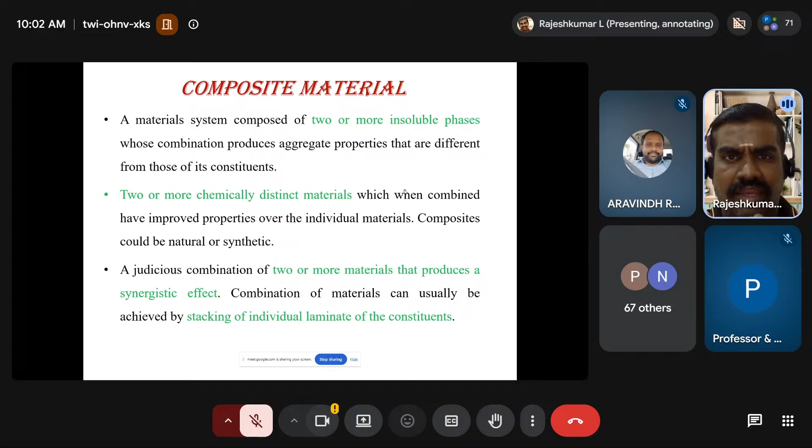So as we know, sandwich is the best example of composite material. Greens, cheese, meat, everything aggregated together has its own nutritional value. So entirely, sandwich will have its own nutritional value. Likewise, in a composite material, when many individual constituents are mixed together, with suitable processing techniques and suitable compatibility ideas, they will render a material of better strength. So this is the ideology of developing composite material.

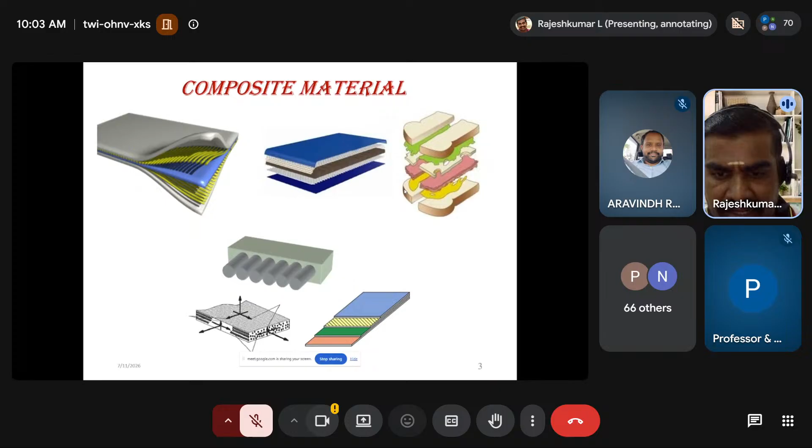So the main advantage of any composite material is its specific strength and specific stiffness. Since the materials are expected to possess very minimum density and as maximum strength as possible, its specific strength is expected to be very high, and it is obviously very high as far as many research results are concerned. And its specific stiffness, that is stiffness to weight ratio, is also very high. Other properties such as fatigue strength and toughness are also very high when compared with a few monolithic metals, not alloys or compounds, monolithic metals.

And the main advantage of any fiber reinforced composite is it is devoid of corrosion. So corrosion will not be an integral part as far as any fiber reinforced composite is concerned. So unlike other metallic or monolithic materials, composite materials will not experience corrosion.

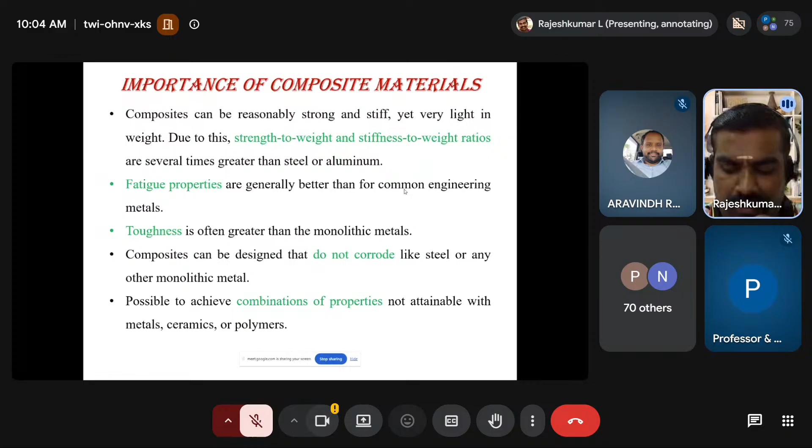So these are some few standalone applications of composite materials, and their application prospects are growing day by day. Since the research on composite materials is getting deeper and deeper, and since the processing techniques, the material novelty, or their process parameters are getting more and more research prospects, the applications of composite materials are getting deeper day by day.

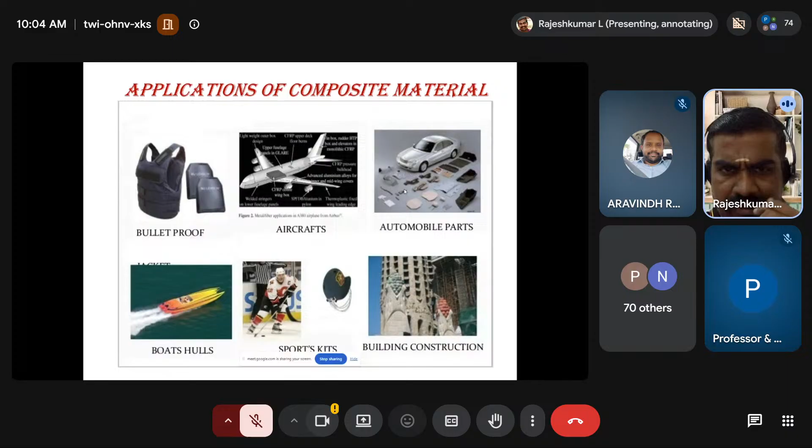Usually, a composite material will have two phases, as we all know very clearly. One is a matrix phase, the other is a reinforcement phase, or a primary phase and a secondary phase. The primary phase is of higher volume and the secondary phase is of a lower volume. The primary phase functions to incorporate the secondary phase within it, and it is characterized by low density and good shear properties, whereas the secondary phase will have high strength, high stiffness, and obviously low density.

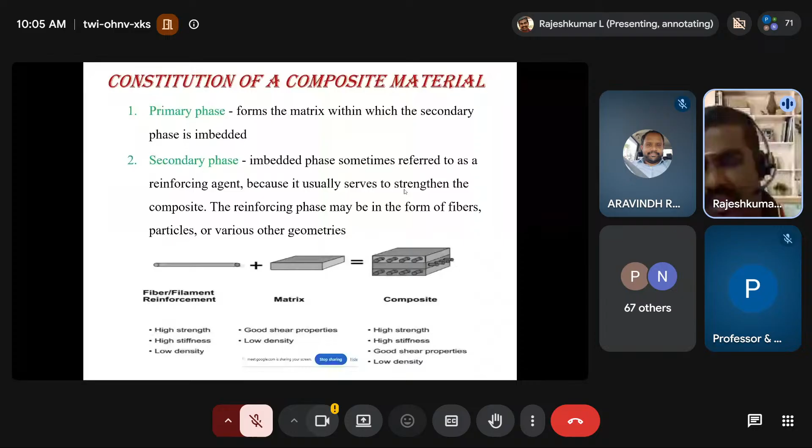When a low density material combines with a low density material, we will get another low density material. And you can see the properties of both constituents of a composite material are aggregated together to form a better performing composite material. Usually the primary phase holds the embedded phase and forms the bulk part, and in most cases the matrix will have a low strength which has to be enhanced by a secondary phase material, but its bonding strength is very high. It is usually corrosion resistant.

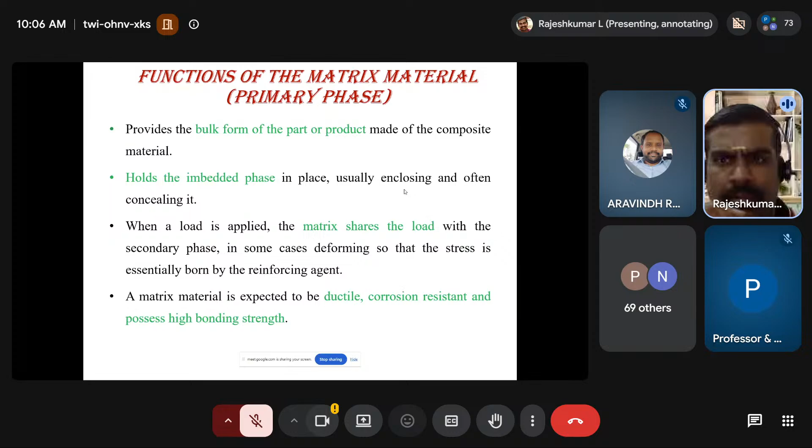The corrosion resistance of the composite material is incorporated by the matrix material alone. A reinforcement material may also not be corrosion prone, but majorly the corrosion resistance is imparted to the composite material through the matrix material. Whereas the reinforcement particle is of lower volume, it is reinforced in lower quantities in the matrix material. They are mixed together to form a composite material, like steel and concrete. Suitable processing techniques are used to form a laminated or fiber reinforced composite material. Mostly the secondary phase will have various forms such as fibers, particles, and flakes.

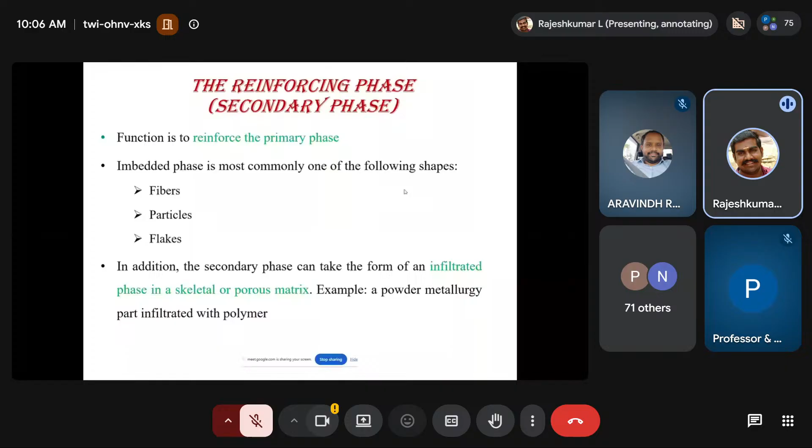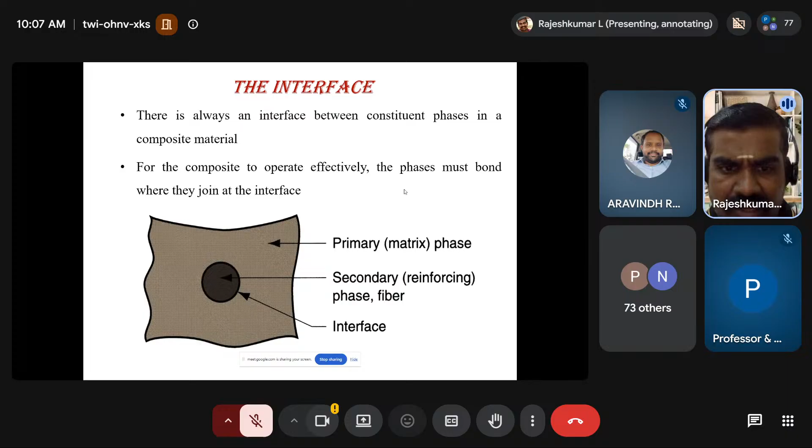This interface forms a region. Interfacial properties of any composite material are very important since both constituent phases of the composites are chemically distinct. They should form an interface, where the interfacial strength of any composite material determines its ultimate strength. That is why, as previously mentioned, the compatibility between the secondary and the primary phase plays a major role in forming the interface. So whenever a composite material has to be a high performance or efficient composite material, its interface has to be as good as possible, so that the interfacial compatibility between the primary phase and the secondary phase is better and the composite material results with higher strength.

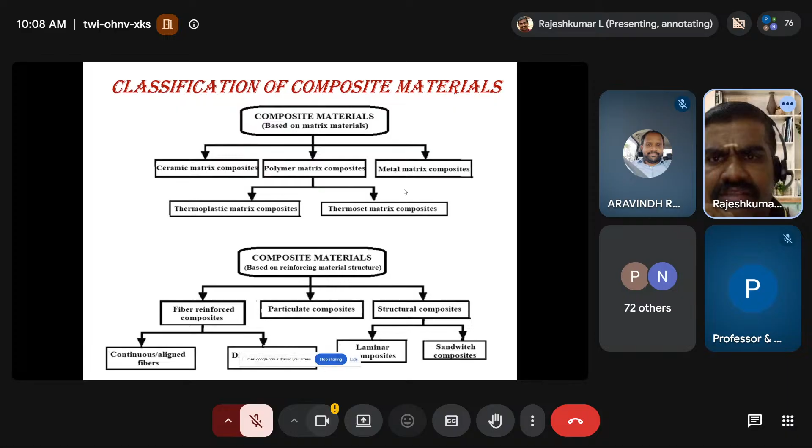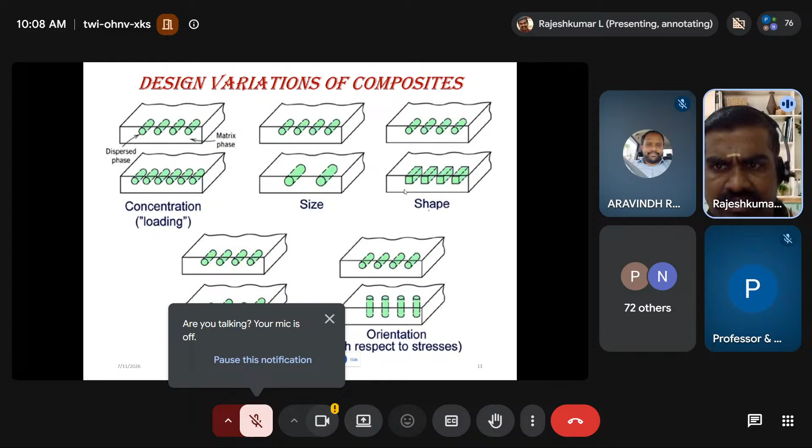So these are the basic classifications of composite material. Based on matrix, we have 3 classifications, and based on reinforcements, we have another 3 classifications. These are very common. As far as any composite material is concerned, a composite can be designed based on various factors. It can be designed based on the concentration, that is either the volume fraction or the weight fraction of any material, or the size of the reinforcement, macro, micro, or nano. Recently, macro reinforcements are dipping down, whereas micro and nano are getting more and more visibility.

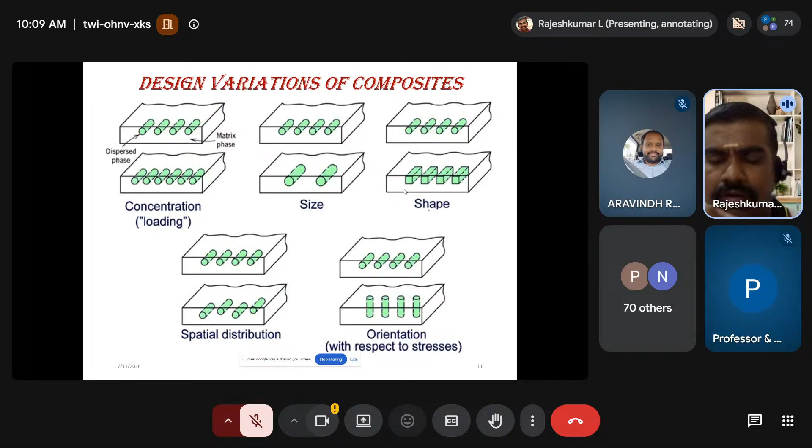And the shape of the reinforcement, as we have mentioned, fibers: rather than long fibers, short fibers are being reinforced recently in many composite materials, and flakes and whiskers are also preferred, so that the specific area which they occupy becomes lesser, the load transfer is higher, and the composite material will have a better strength. The spatial distribution, either unidirectional, bidirectional, or random orientation in fiber reinforced composites, is another factor by which a composite material can be designed, and the orientation with respect to the loading direction. Whenever the loading direction varies, the orientation of the secondary phase can also be varied, so that in that particular direction, the load bearing capacity of the composite material is better.

And usually there are natural and synthetic fibers in existence, and the synthetic fibers are derived from non-natural sources. So in order to counter that particular disadvantage of synthetic fibers, natural fiber is being used to reinforce the matrix material, a plastic, a thermosetting or thermoplastic material. Even though natural fibers have comparatively lesser strength when compared with synthetic fibers, they have their own application areas, and due to their sustainability, biodegradability, and renewability, natural fibers are mostly preferred in the current scenario.

And even though they are used only in low or medium density applications, their applicability shows a wider improvement due to various advantages of those natural fibers. Even the cost of processing of natural fibers is comparatively lesser than synthetic fibers. So these natural fibers have become the center of attraction for many researchers, and various research works are being undertaken as far as natural fibers are concerned.

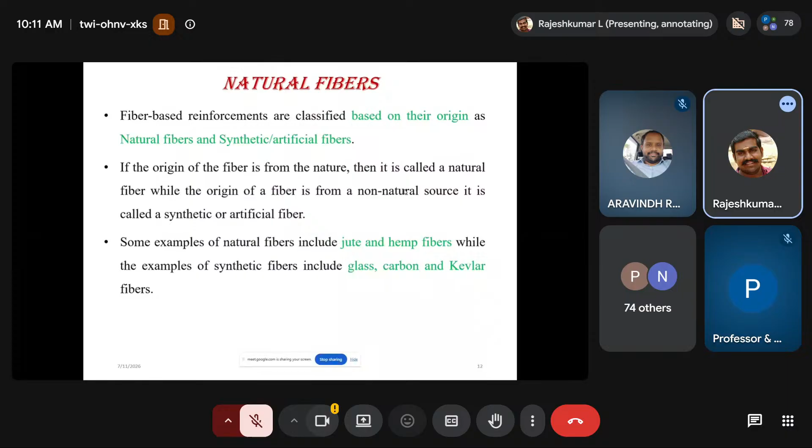Natural fibers can be used in various applications based on their origin, and some examples of natural fibers include jute and hemp. We'll also see the classification of natural fibers. Natural fibers are derived from various plant parts. Not only plant sources, but animal and mineral sources are also sources of natural fibers. So natural fibers don't mean only plant-based fibers, but also animal

And we know in most cases, animal fibers are also used as reinforcements. And recently, humans are also a source of natural fibers, like keratin. Keratin is the best source of natural fiber. Hair fibers are being researched in many cases as short fibers. So natural fibers are derived from natural renewable sources.

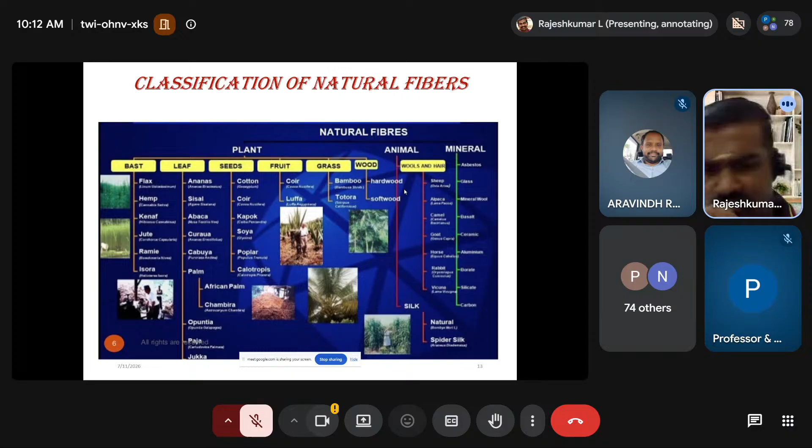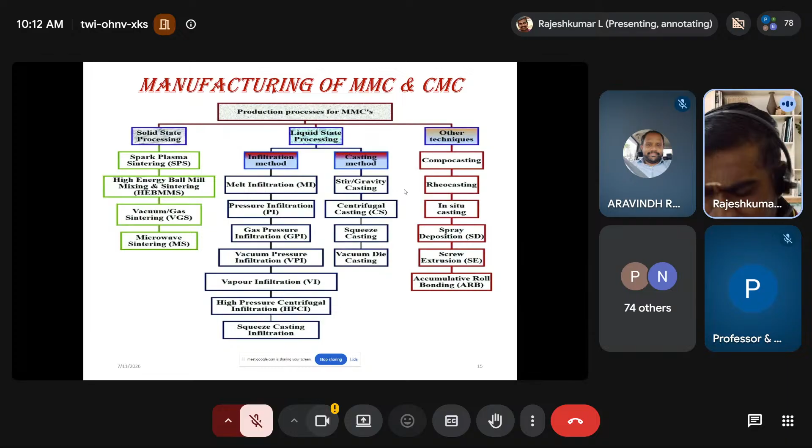Some of the common methods of manufacturing metal matrix and ceramic matrix composites are listed here. However, we are interested in manufacturing polymer matrix composites. There are four major methods of manufacturing polymer matrix composites. The main objective of all these methods is to develop a proper interface between the matrix and the reinforcement so that the interfacial strength of the composite increases, ultimately resulting in maximum strength of the composite material being developed. The most commonly used methods are hand layup, compression molding, and vacuum bagging.

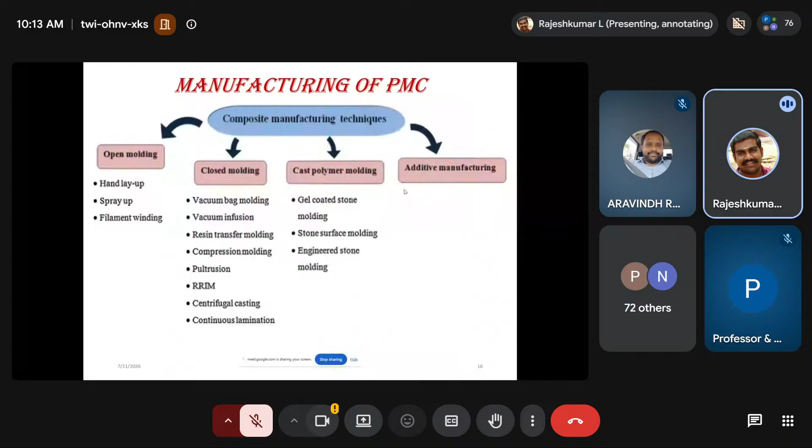And recently, additive manufacturing is a highly emerging area, where most researchers are oriented towards additive manufacturing methods to have better publishability of papers. Hand layup is a very simple and the oldest method of manufacturing composite materials. It is completely manual, and the fibers are reinforced layer by layer, over which a layer of resin is coated, and the final part is trimmed off.

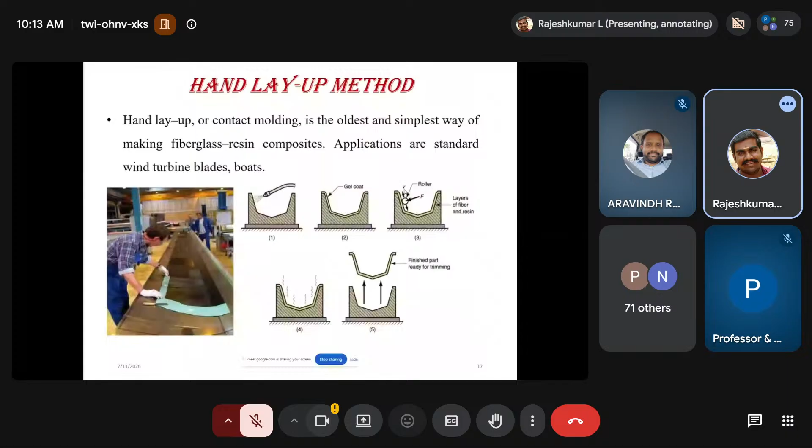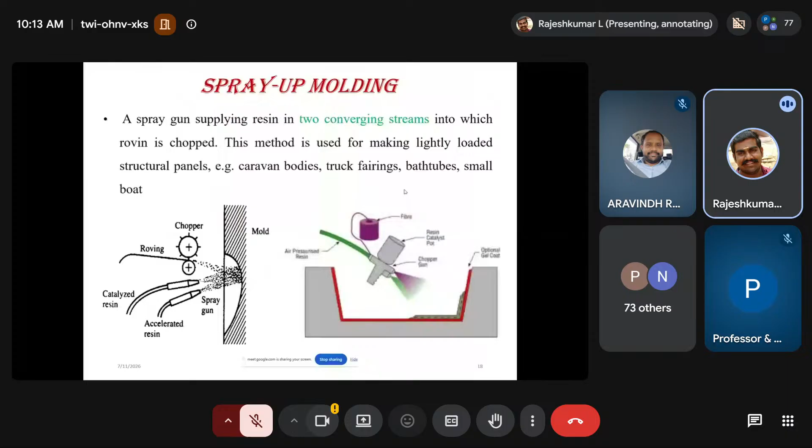Next is spray layup, which is like the hand layup method, but rather than placing layer by layer, both phases are sprayed together on a mold, and finally they are cured and used further. Vacuum bagging is specifically used for woven type natural fibers. When the fibers are used in the form of mats, vacuum bagging can be used, whereas this method cannot be used for short fibers or whiskers, and even for fillers, since the vacuum pump may be clogged.

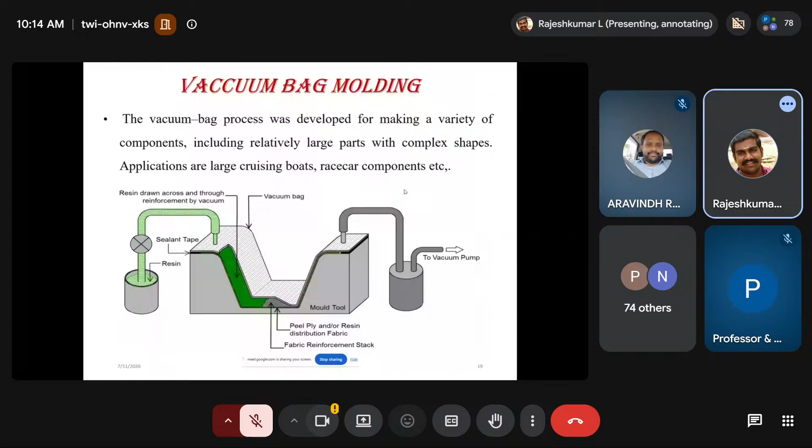So vacuum bagging is another type of composite manufacturing method. The composite resulting from vacuum bagging will have a better interface compared with other methods, other than compression molding. Compression molding is another technique, an advancement of hand layup, where pressure and temperature are applied through automatic machines. Pressure and temperature can be controlled through suitable gauges, and it contains an upper mold and a lower mold. In hand layup everything is manual, whereas in compression molding, when we place the laminates within the mold, the pressure and temperature control takes care of the cure. So compression molding is a major method of manufacturing composite materials these days.

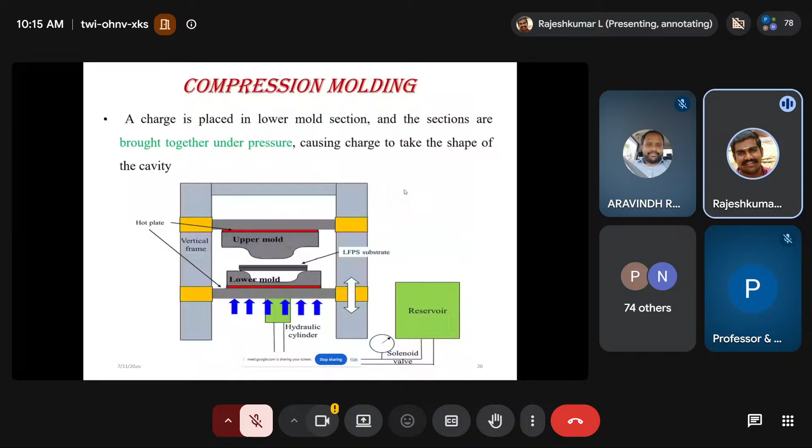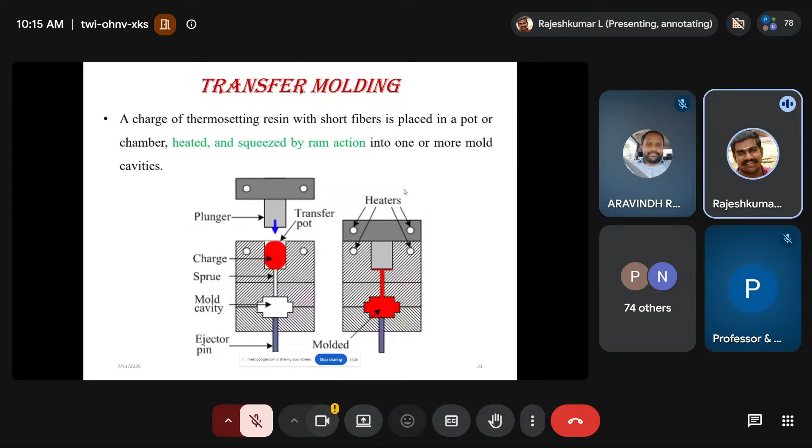When the compression molding machine is not available, researchers may opt for hand layup. Next is transfer molding. This is a very least used technique, however it was in existence previously. Transfer molding and injection molding are alike. These are specifically used for thermosetting composite materials. Injection molding is also used for large quantity production with low cost. A mold is injected with the contents of the composite and cured, and the mold is taken out with the final casting.

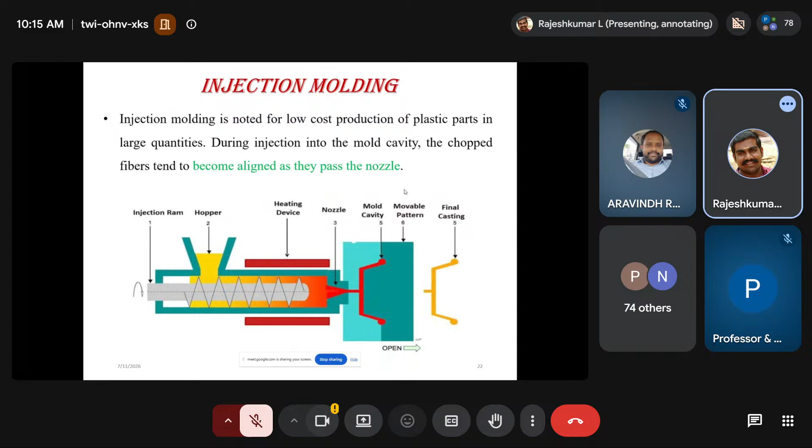And the most highly emerging technique is additive manufacturing, or 3D printing of composite materials. The research trend is in a transformative stage as far as additive manufacturing is concerned. So far, all the methods are analog, whereas this method produces a purely digital composite material. In all the previous cases material may be removed to obtain the final shape of the product, whereas in additive manufacturing the final shape is obtained directly by adding materials according to a predetermined model of the product.

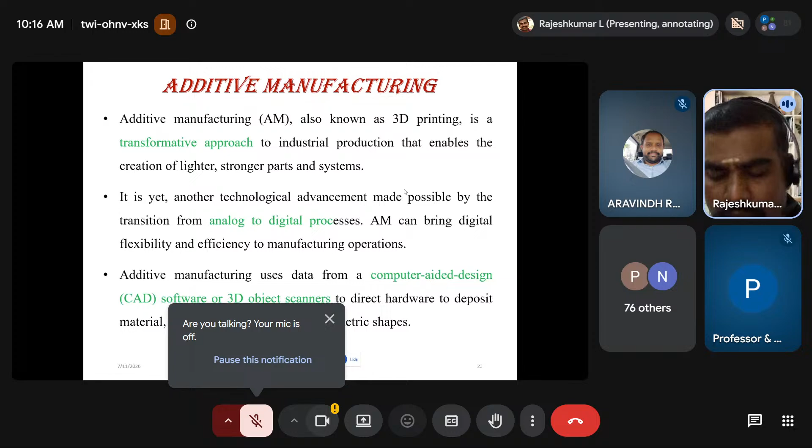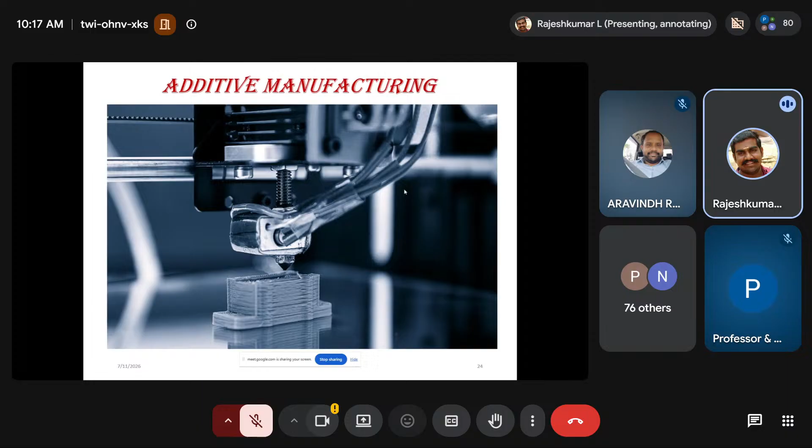Support structures are an integral part of additive manufacturing methods, where, in order to avoid distortion of the final material, whenever the lengths and breadths of the printed parts are very high, supports are given. The support structures are then removed, and finally this material is cured to form the final product. However, the strength of the final 3D printed product is not on par with the composites built through other methods.

Currently the major research works focus on reinforcing either particles or short fibers with plastic materials to form filaments, and only the filaments are given as input to the additive manufacturing machine or 3D printer. Those filaments contain the matrix and reinforcing materials, and the final composite printed in a 3D printer will contain the natural fibers directly embedded into the filaments.

The most commonly used methods of additive manufacturing are fused filament fabrication, SLA, selective laser sintering, direct writing, and binder jetting. The main advantage of additive manufactured parts is the manufacturing of intricate shapes in one shot, and complex parts can be easily built, whereas the main disadvantage of any additive manufacturing method is the time consumed, the material used, and the incompatibility in using the material in developing the filament material.

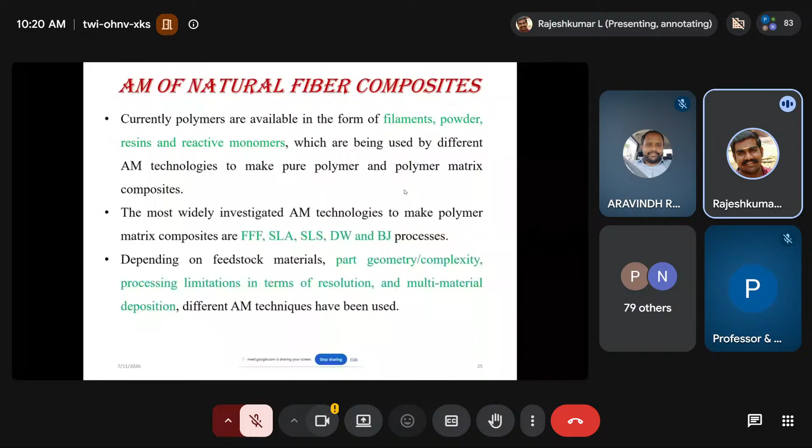So the most commonly used method of additive manufacturing is fused deposition modeling, since it consumes less material, the setup of this technique is very easy compared with other methods, and the reinforcement of fibers within the matrix material can be accommodated comparatively better. The filaments are melted, extruded through a nozzle, and deposited on a platform where the layer by layer build of the final product is done, and finally the 3D printed part emerges.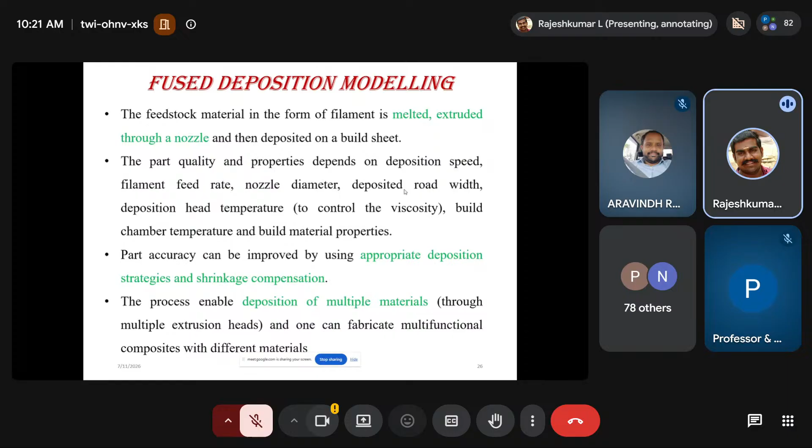Most of the process parameters, including deposition speed, filament feed rate, nozzle diameter, width, and head temperature, play a major role as far as the final product is concerned. Shrinkage compensation and appropriate deposition strategies are very important to develop accurate parts. Deposition of multiple materials is also possible, but this once again needs serious research. Hybrid materials have the most scope as far as additive manufacturing methods are concerned.

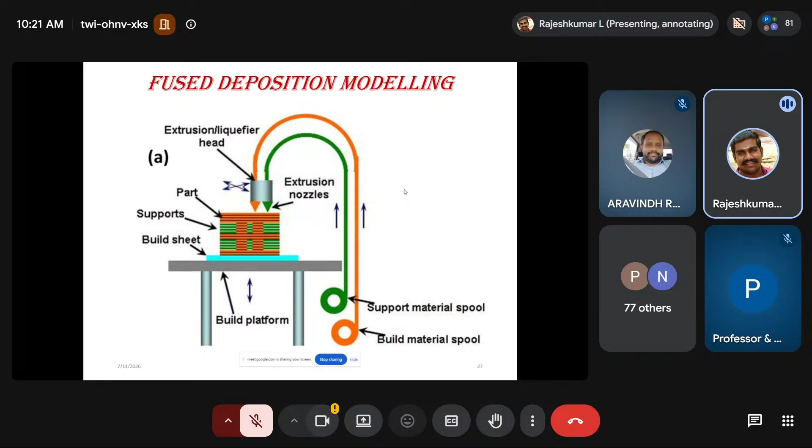This shows the schematic of fused deposition modeling. Support material and build material are fed separately into a nozzle, and whenever the model identifies a supporting region, the support material is added, and whenever it is the build material that is identified in the STL file, the build material is added.

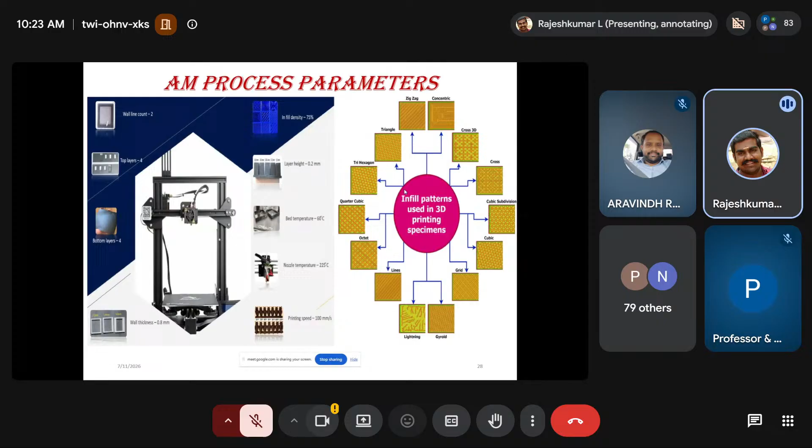Specific strength of any 3D printed material is very high, and there are 14 infill patterns, most of which possess strength close to honeycomb structures. So infill pattern variation is another prospect of research, where the strength of the 3D printed part can easily be compared with honeycomb structures. And the properties of the composite materials which are mostly evaluated.

Whenever a composite material is evaluated for its properties, in most cases there is a hope that the composite material which is developed has to be measured for all the properties, which is not actually the case. A composite material is developed for a specific application.

There will be a specific application for which the composite material, specifically the natural fiber composite materials, are developed, and only the properties which are warranted by the application have to be measured, so that the composite material will specifically serve its purpose. Rather than measuring all the properties, the application oriented properties are to be measured for any composite material, which will be most suitable for a developed material.

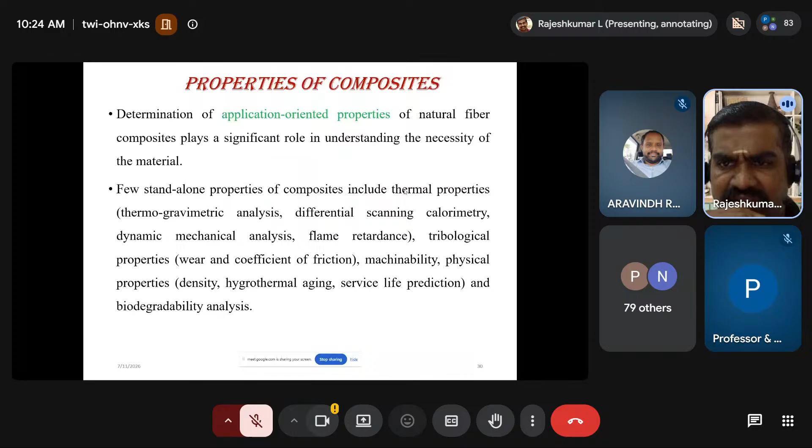There are various properties that include thermal properties, mechanical properties, tribological properties, machinability, physical properties, and biodegradability properties. Biodegradability is specifically applicable only to natural fiber composite materials. Natural fibers have their own micro constituents like cellulose, hemicellulose, lignin, pectin, wax, and other materials, which influence the mechanical properties of any natural fiber.

Not only mechanical properties, these micro constituents influence the properties of the natural fibers being incorporated, which in turn impart their own properties to the final composite material in which they are reinforced. Mechanical properties are majorly influenced by the crystallinity of cellulose, or the non-crystallinity of the cellulose in a few cases, the combined amount of hemicellulose and lignin, and even the presence of lignin.

Whenever mechanical properties are to be measured, the material needs higher hardness. Higher crystalline materials are highly hard and brittle materials, whereas the matrix material is ductile. Whenever a brittle material is reinforced within a ductile material, obviously the strength of the final composite material is going to be improved.

Coming to moisture absorption, it is governed by the presence of hemicellulose, non-crystalline cellulose, lignin, and crystalline cellulose. Thermal degradation is influenced by the presence of hemicellulose, presence of cellulose, and a partial presence of lignin. Whereas biological degradation depends on the presence of all the micro constituents. So these are their influences.

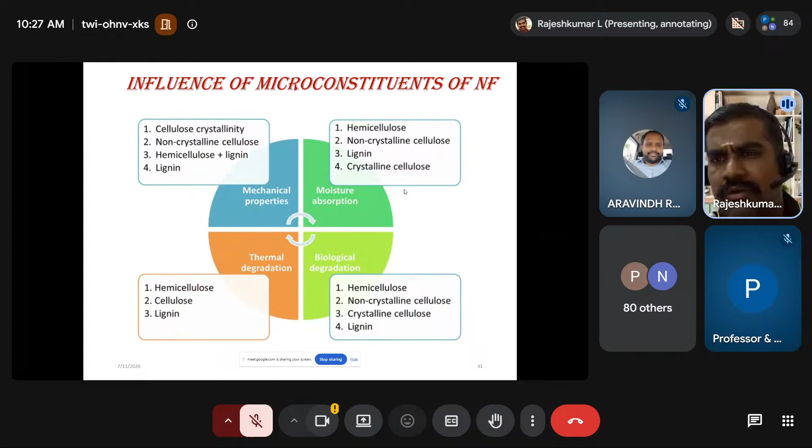Whenever the micro constituents are not in the required or expected quantities, the natural fiber will have the least prospect of being used as reinforcement. Mechanical properties are the most determined properties as far as natural fiber composites are concerned. So we are dealing with the properties other than mechanical properties, since they are the most researched and almost saturated.

Tribological properties can be evaluated for any natural fiber composite for their application in either contact or bushing applications, so that the assessment of wear and frictional behavior under various loading conditions and process parameters can be made. As we know, many research papers focus on optimizing the process parameters for natural fiber composite materials subjected to tribological analysis.

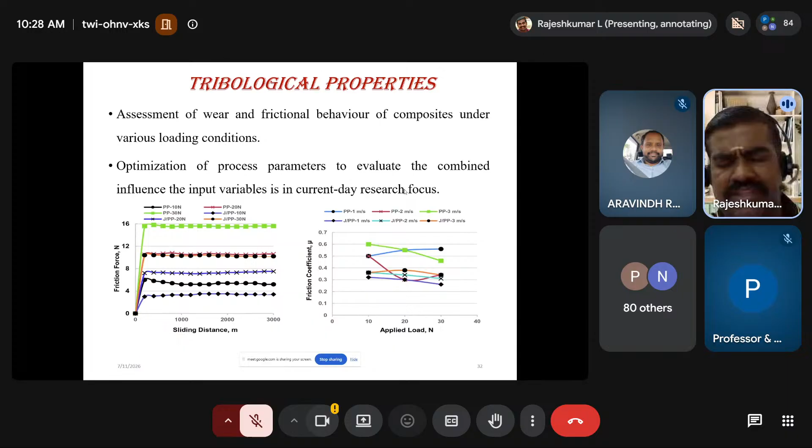Recently many research papers are detailing the use of natural fiber composite materials as automotive friction components also. So tribological properties have higher prospects as far as natural fiber composites are concerned. Material-based factors like composite configuration, nature of the fibers, fiber alignment, and machine-based factors such as applied load, sliding speed, temperature, sliding velocity, and type of wear mechanism can be used for assessing the wear behavior or tribological properties of any composite material.

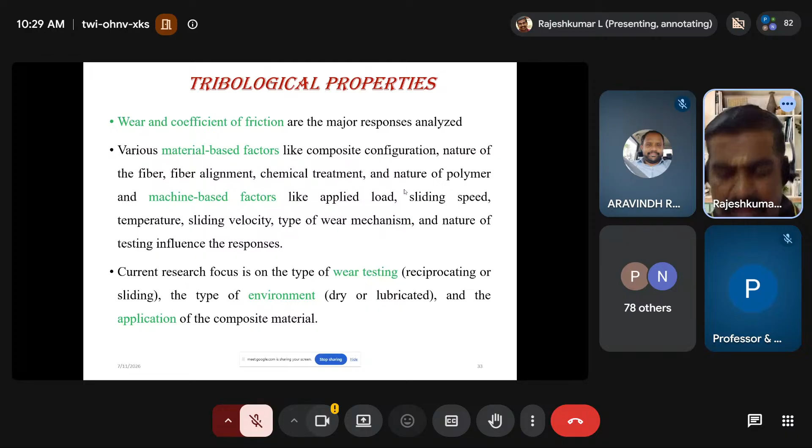Most researchers focus on the type of wear testing and type of environment, added to this the temperature and the application of the composite material. It is very clear that whenever tribological properties are measured, it indirectly means that those composite materials can be readily applied in contact applications. So these are some of the insights regarding the tribological properties of composite materials.

Morphological analysis plays a major role when composite materials are subjected to tribological testing, and many inferences like the compatibility and the fiber and matrix adhesion can be drawn from it. Pin-on-disc and ball-on-disc are the major methods of measuring tribological properties.

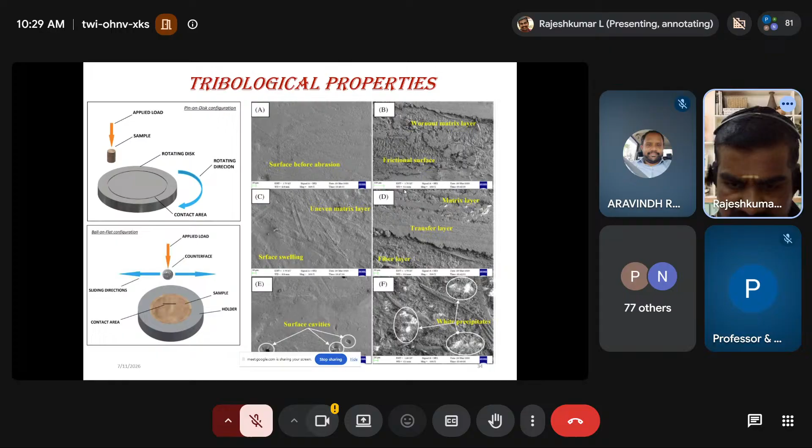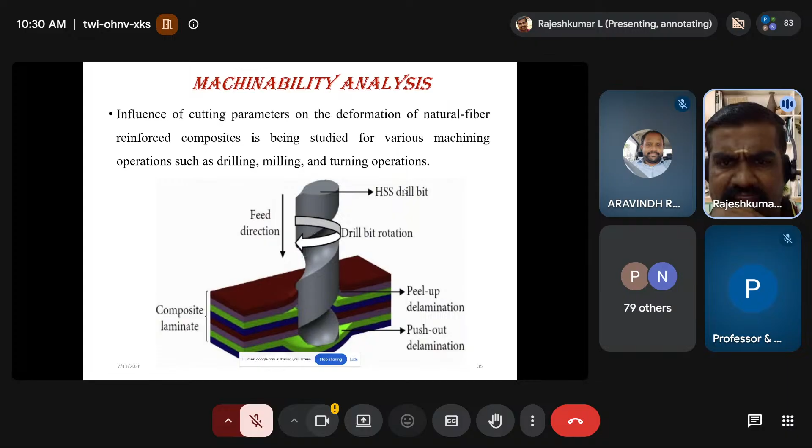And next most researched property is the machinability property. Like drilling, milling, and turning, the composite material is subjected to various machining operations, and the behavior of the natural fiber composites against these machining operations is being analyzed, and the inferences are being drawn against those cutting parameters. And we know that most of the composite materials are not directly applied in final applications. They will be subjected to a suitable machining operation. So that is why this machinability analysis plays a major role.

And various prospects of subjecting the natural fiber composites to various machining operations are being shown in this particular slide. Applications demand the machinability analysis, whereas the milling and grinding operations are having higher prospects rather than drilling. Drilling and turning were the most researched machining operations, whereas milling and grinding are the least researched operations. Researchers who are into the machinability analysis of natural fiber composite materials may focus on milling and grinding.

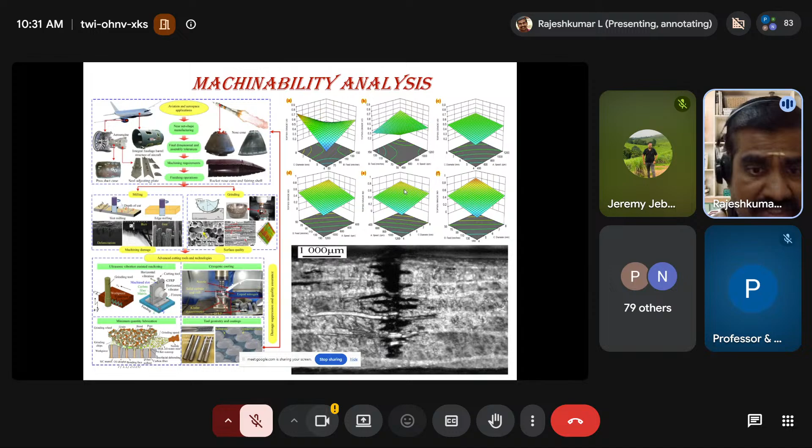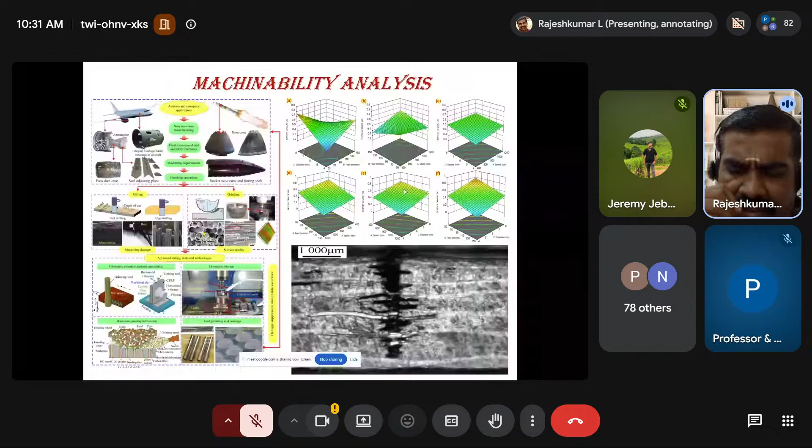Apart from this, many non-traditional machining operations like abrasive jet machining and water jet machining are used to assess the behavior of natural fiber composite materials, since those are non-contact type machinings. And here also morphology of any composite material plays a major role in determining the behavior of the natural fiber composite material against any of the machining operations.

The next most researched property is the thermal property, which is the most important property as far as any composite material is concerned. Whenever the natural fiber composite materials are being applied at high temperature applications, the determination of thermal properties plays a major role. As we have seen earlier, the thermal stability, crystallization kinetics, and the behavior of the composite material against combined thermal and mechanical loads are being researched and analyzed.

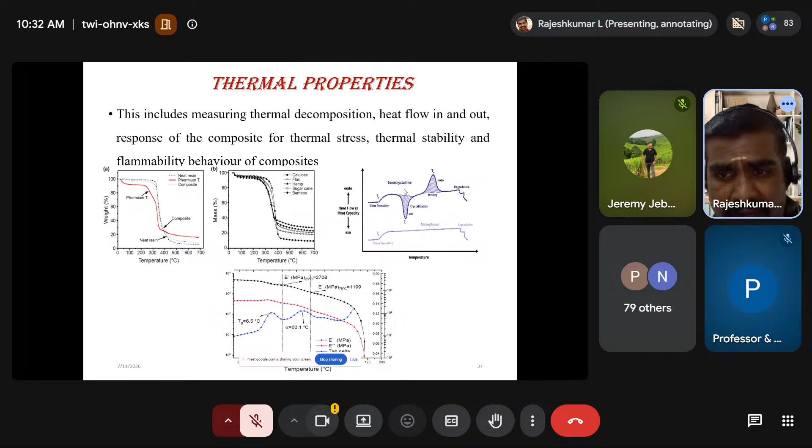And flammability is also another important parameter. Whenever the composite material is expected to be a fire resistant or a flame resistant material, the flammability behavior of a composite material is also to be analyzed. Thermogravimetric analysis assesses the thermal stability of any composite material. A composite material is subjected to a rise in temperature, and the behavior of the composite material with respect to time and the temperature rise is plotted, and the plot is used to assess the thermal stability of any natural fiber composite material.

And differential scanning calorimetry is used to analyze the phase transition of any composite material against time and temperature. And flammability analysis is used to determine the flame retardance or the fire resistance of any composite material. That is, when the material is ignited, how long the material withstands the fire is the assessment criteria as far as flammability analysis is concerned. And the limiting oxygen index evaluates the ability of the material to undergo combustion. Apart from this, heat deflection temperature is also another common method of testing of any composite material.

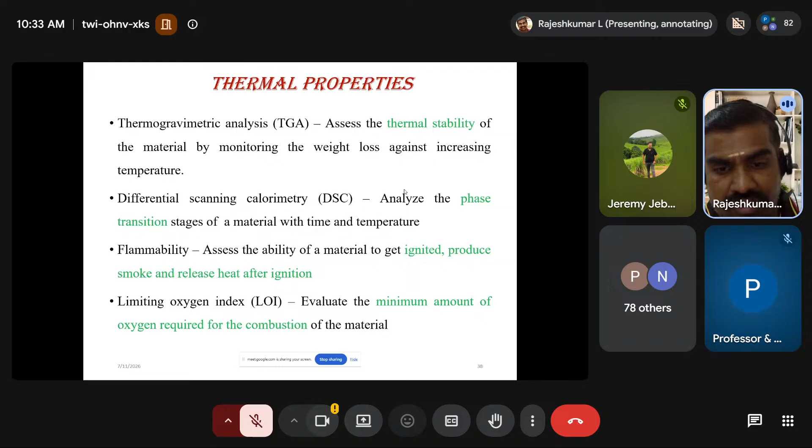Next is the biodegradability analysis of any composite material. This property is specifically applied only to the natural fiber composites. This cannot be evaluated for any synthetic fiber composite material, since they are not breathable. Only natural fiber composite materials are breathable and biodegradable. There are various methods of determining the biodegradability of any composite material. Either it can be a soil burial test, or it can be a compost, or it can be a landfill test of any sort.

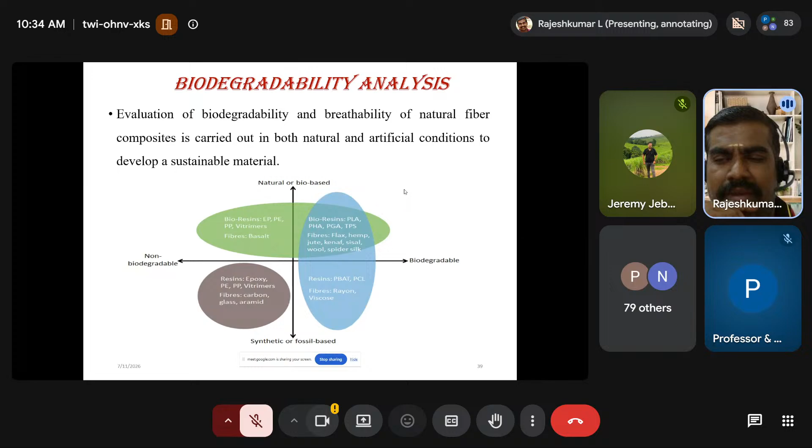And whenever the material is biodegradable, after the service life of the composite, during the disposal of the composite material, the biodegradation plays a major role, which should not actually pollute the environment. So for evaluating that particular property, biodegradability analysis is very much important as far as natural fiber composites are concerned, and how far they are biodegradable and how far the service life of the natural fiber composite material is extended are the major results which we obtain using the biodegradability analysis.

And there are many researches which are going on end of life cycle. See, every composite material will have its end of life. So after the ending of the service life of any composite material, this biodegradation plays a major role. So either the composite material will be discarded, or the composite material will be recycled. Only these two aspects are possible after the service life of any composite material.

So whenever the composite material is being recycled, various methods of recycling involve chemical, thermal, and mechanical recycling. And whenever the composite material is being discarded, it is discarded through soil burial, through composting, through digestion, or through landfill to mineralize the natural fiber composite material. Synthetic fiber composite material will not undergo mineralization, whereas only natural fiber composites undergo mineralization.

So they are being ingested by the enzymes. They are being converted into useful products whenever they are being discarded in the soil. So these materials are soil-friendly materials. And whenever the composite material is being recycled, they are again developed into a product. They again enter into the service life.

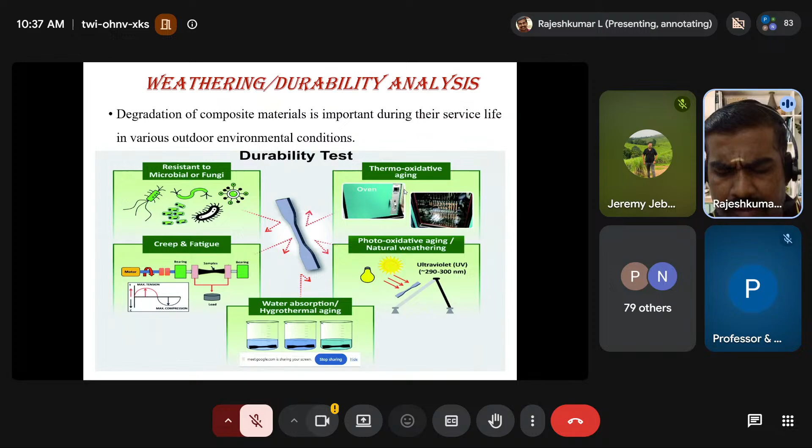Whenever the composite material is formed as a product, the product may not be used in a closed environment; it may be used in an open environment, and the open environment will be subject to all possible environmental conditions. So before even developing the product, the composite material has to be subjected to weathering or durability analysis, so that the durability of the material can be assessed in any environmental condition possible.

And the durability analysis is done with two different factors. By the environment, either mechanical weathering or chemical weathering is done. And through testing conditions, it will be used in open environmental conditions without any add-ons. It will be put up in the open environment, and the weathering behavior of the natural fiber composite in natural conditions is assessed.

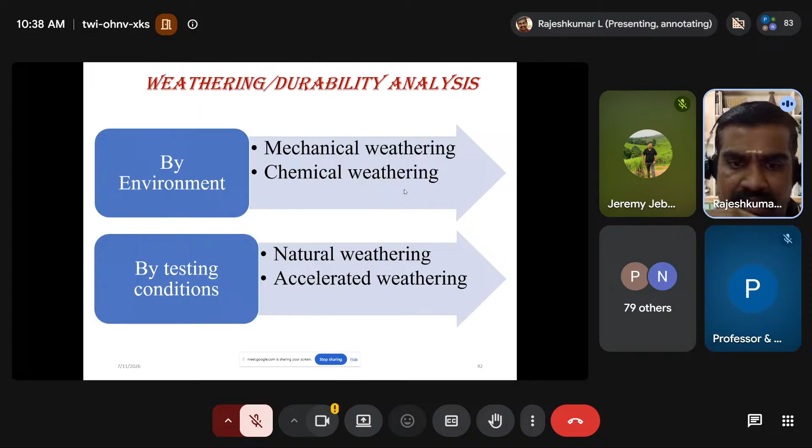There is another condition called accelerated weathering. The simulation of the natural conditions is done in a condensed period of time, and the weathering behavior of natural fiber composite material under accelerated conditions is also evaluated to determine their durability.

So among the various factors involving weathering, one, air is the major factor, which induces physical change. And whenever physical change is induced in the composite material, the surface roughens or the tissues are removed. Since it is a natural material, tissues are removed so that the microconstituents deplete, and the depletion of microconstituents changes the behavior of the composite material.

And moisture is a major factor as far as weathering is concerned. Since most natural fibers are hygroscopic and hydrophilic, moisture plays a major role in deteriorating the durability of any composite material, whereas sunlight plays another major role. These three are the major factors which are to be accounted for whenever the durability of a composite material is assessed during weathering.

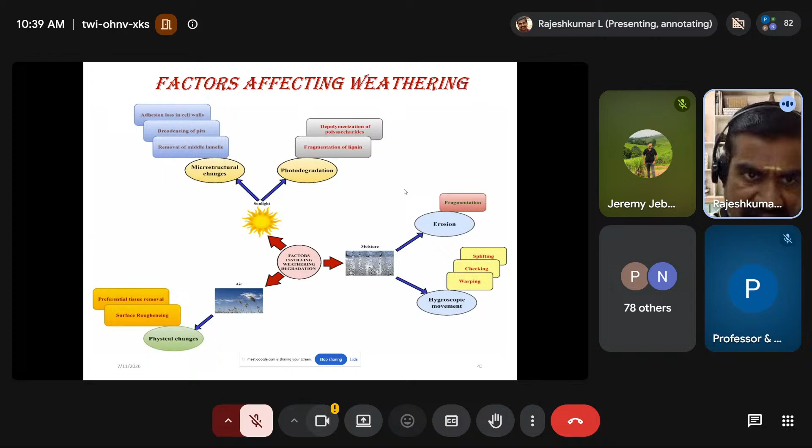And usually natural fiber composite materials, in order to obtain higher strength, are hybridized to form hybrid composites. Hybrid composites have further advantages when compared with individual natural fiber composite materials. The definition of a composite material remains as it is, whereas two or more secondary phases are used as reinforcement, so that they form hybrid composites.

And here the major factor of concern is the compatibility between the two secondary phases. It is not only sufficient to assess the compatibility of the matrix phase with the reinforcement phase in the individual natural fiber composite; in hybrids, it is also important to measure the compatibility between the two secondary phases, so that they do not pull down the advantage of the matrix material. So they add to the advantage of the matrix material and finally result in very high strength composites.

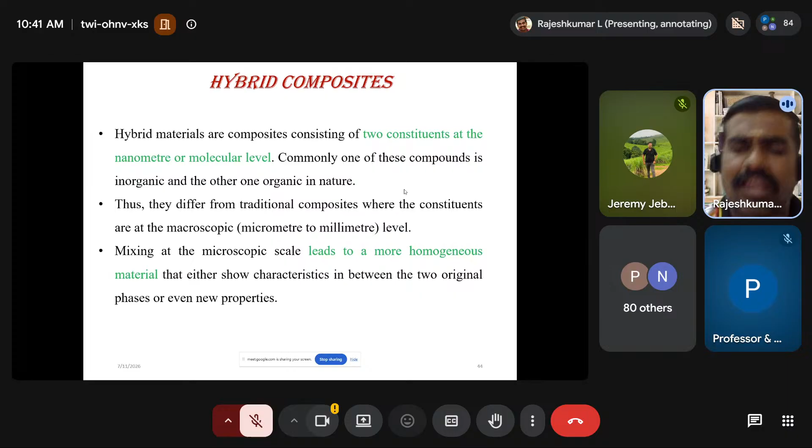One classic representation of a hybrid material is graphene platelets used in a polymer matrix, forming the graphene platelet reinforced polymer matrix composite. And whenever one more particle or additional hybrid reinforcement is used as a hybridization strategy to a modified matrix material, then a graphene platelet and particle reinforced hybrid composite emerges.

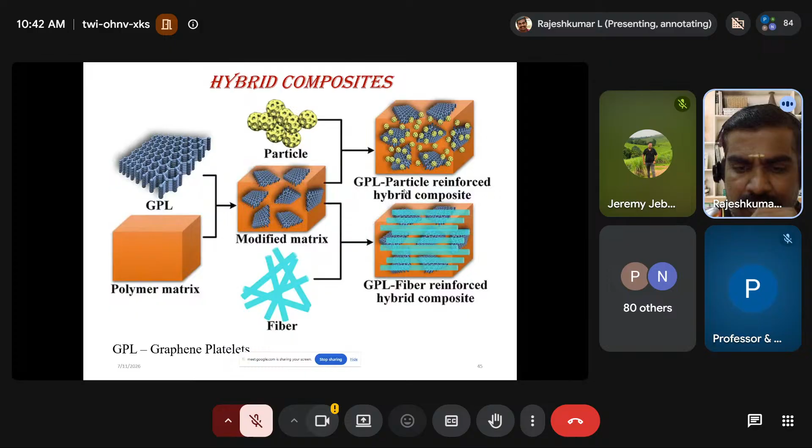In other case, whenever short fibers or critical length fibers are being used as reinforcement, graphene platelets and fiber reinforced composite materials emerge as hybrid composite materials. Some of the design variations of hybrids are being shown. The secondary reinforcement can be homogeneously dispersed, or they can be alternatively placed.

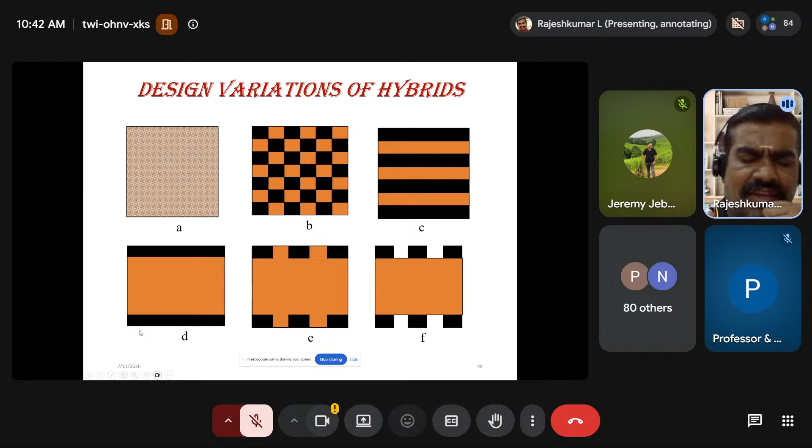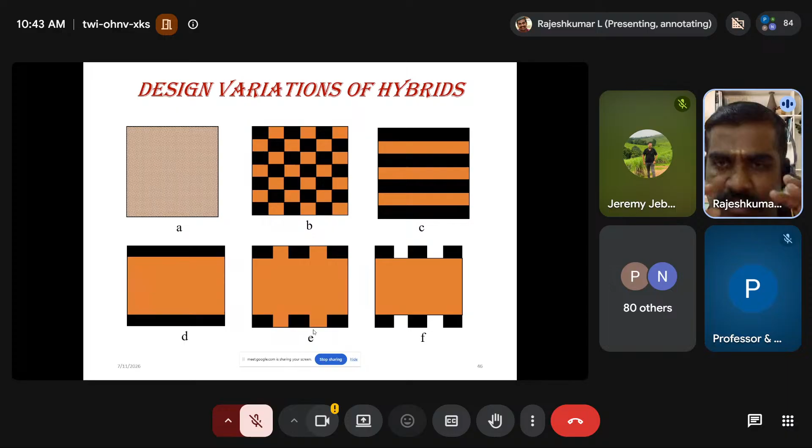And whenever there are two or more reinforcements, in C, the stacking sequence can be varied, or in D, the sandwich composite material can be used, or they can be alternatively sandwiched in clusters, so that the hybrid composite material specifically applies to any one specific application.

And the hybrid materials are majorly classified based on two factors. One factor is based on the functions, the other based on the bond strength. The functional classification renders three hybrid composite materials: structurally hybrid materials, functionally hybrid materials, and chemically bound hybrid materials. As far as bond strength is concerned, class 1 and class 2 hybrids are emerging. Class 1 hybrid materials show weak interactions between the two phases, whereas class 2 hybrid materials show strong chemical interactions such as covalent bonds.

So whenever the compatibility is being measured for the secondary phases, only the secondary phases which have the potential to form covalent bonds are preferred mostly, so that class 2 hybrid materials emerge, which renders strong chemically interactive composite materials with better strength.

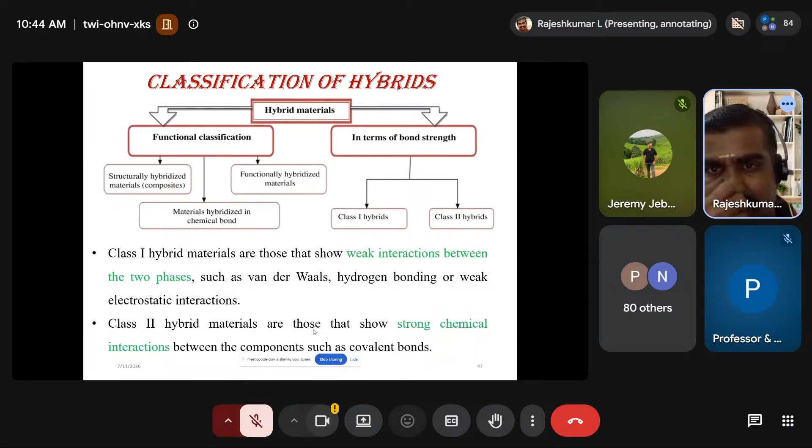Some of the advantages of hybrid materials are they have specific optical, electronic, and magnetic properties when compared with the individual fiber reinforced composite materials or individual polymer matrices. And rather than the solid state inorganic materials, hybrid materials show more polymer-like handling because of their large organic content or the formation of cross-linked inorganic networks with the small molecular precursors, so that the polymerization reactions are very swiftly formed, forming high-strength hybrid composite materials.

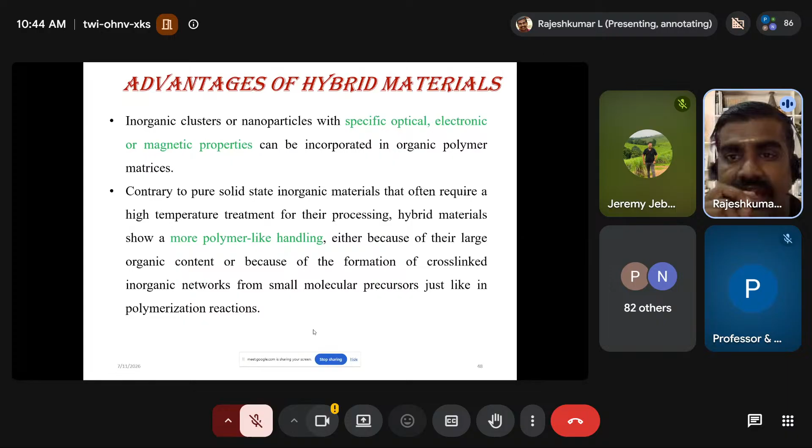Some of the applications of hybrid composite materials include scratch-resistant coatings, electronic applications, and fire-resistant hybrid materials. Whenever a fire-resistant material is to be developed, one natural material with one synthetic material can be used, like natural filler can be used as a fire retardant material, and one more synthetic filler like aluminum phosphate or boron carbide can be used as fire resistant filler, so that the fire resistance of the composite material increases further when compared to the usual composite materials. And they can also be used as dental filling materials, electrolyte materials, and obviously as corrosion protection materials.

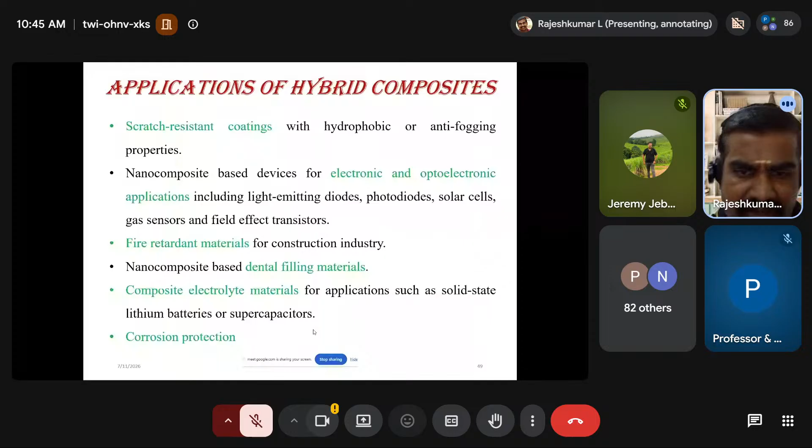Next class of materials, as far as the natural fiber reinforced materials are concerned, are the nanomaterials or nanocomposites. The materials which we have dealt so far are in micro scale, and next will be the materials in nanoscale. As we know, whenever a nano-sized particle is the constituent of any composite material, we call it a nanocomposite. And whenever nanomaterials are being used in polymer matrices, they are specifically called polymer nanocomposites. Polymer nanocomposites experience drastic improvement in properties, since the specific area occupied by the nanoparticles is very high, and the stress concentration zones are very less when compared with the fiber reinforced or the hybrid composite materials.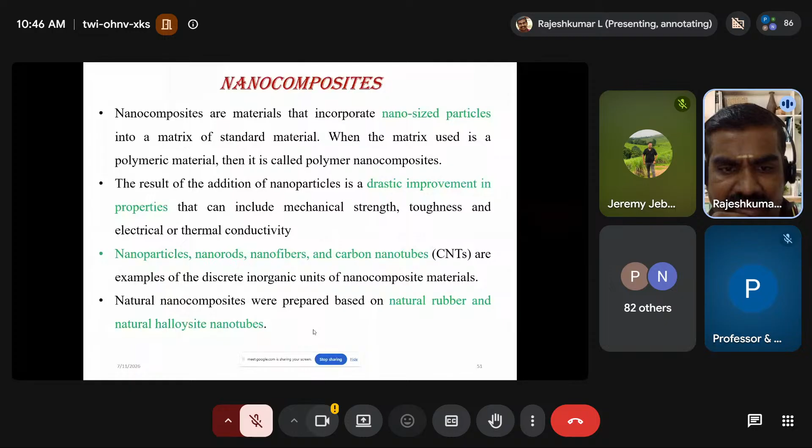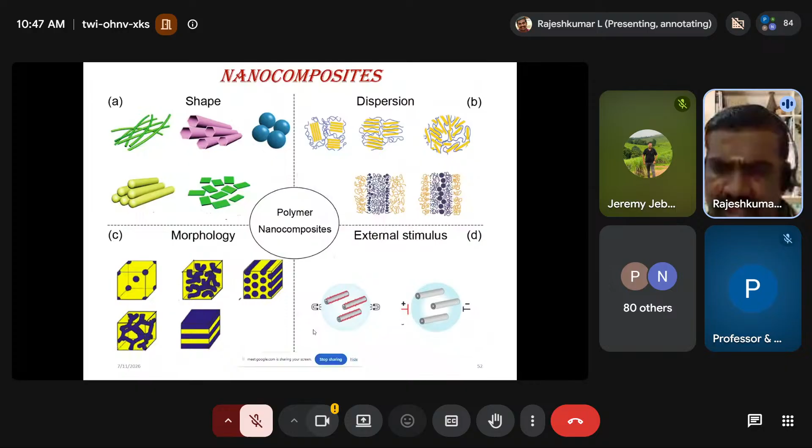Some forms of nanomaterials which can be reinforced are nanoparticles, nanorods or nanofibers, and nanotubes, specifically carbon nanotubes or halloysite nanotubes. These are the secondary phases in nanoscale which can be used in a polymer matrix. The variations of nanocomposites include shape of the reinforcement, as we have seen: fibers, rods, fillers, tubes, and flakes. Dispersion mechanism is another variation, and morphology of any nanomaterial reinforced polymer matrix is another variation of a polymer nanocomposite. And external stimulus is another factor that forms another variation of a polymer nanocomposite. Each nanocomposite will have their own strengths and weaknesses, and mostly they possess very minimum weaknesses compared with their strengths.

And currently polymer nanocomposites are developed based on bio-inspired concepts. Whenever nanocomposites are developed using bio-inspired concepts, they have a very good dispersion of the nanomaterials within the matrices. Their structures are found to be aligned, and the content of the reinforcement is as high as possible. Whenever the content of the reinforcement is as high as possible, the strength of the composite is very high, and the interface is very important as far as nanocomposites are concerned.

The interface is tailorable. Whereas whenever nanocomposites are manufactured using traditional methods, they have very low strength due to poor dispersion, the dispersion structure is very random, and more content cannot be used due to agglomeration. Agglomeration is a major issue when a suitable processing technique is not used, and the interface cannot be tailored with the traditional method. So polymer nanocomposites have to be developed based on bio-inspired methods, so that the advantages are very high compared

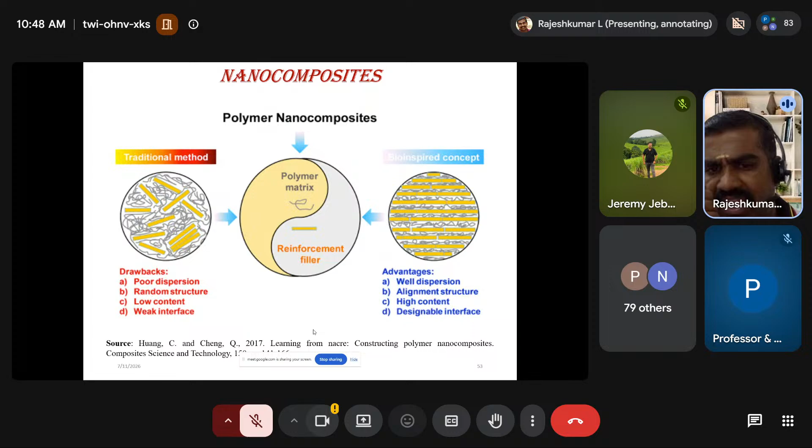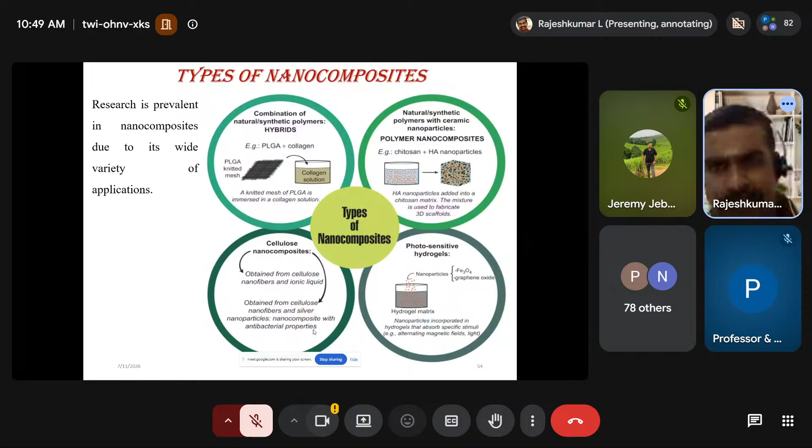with the traditional methods. Some of the types of nanocomposites include hybrid nanocomposites, including natural nanomaterials like collagen, and natural or synthetic polymers with ceramic nanoparticles. Since natural polymers are used with ceramic nanoparticles, they form polymer nanocomposites with higher strength. Also hydrogels and aerogels as the reinforcement material in a polymer matrix, and cellulose or nanocellulose based nanocomposite materials. These are some of the variations in nanocomposite materials.

The applications of nanocomposites have a very wide spectrum. They can be used in cables. Very specifically, they are used in energy storage, biomedical applications, sensor-based applications, and EMI shielding applications. Due to the presence of nanoparticles, their porosity increases, so their specific surface area increases. So the energy storage capability of nanocomposite materials is very high, they can be used for EMI shielding due to their barrier properties, and as biosensors due to their sensing abilities, due to the accommodation of more sensing elements.

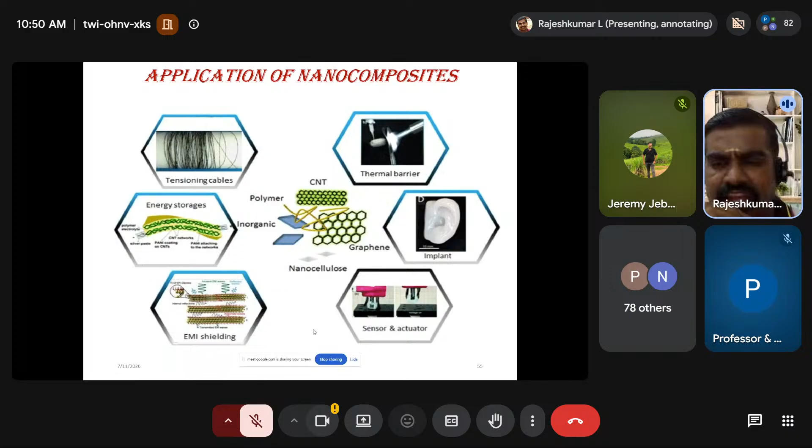Their sensing abilities will be very high, and their biomedical applications cannot be described in words, so they have very high prospects in biomedical applications due to their renewability and better strength compared with synthetic materials. So any nanocomposite material will have research in all these prospects, and whenever research on a nanocomposite focuses on any of these aspects, it has a good prospect of publication and of extending the research to another level.

So the properties of nanocomposite materials can be measured very easily. I mean, not very easily. They can be measured in a very wide range. So developing a nanocomposite material itself is a very novel aspect as far as natural fiber composite research is concerned. And their characterization is another part. Whenever they are characterized using proper characterization methods, their application prospects can be very easily decided, and the synthesis methods of any

nanocomposite can be easily optimized, so their synthesis method plays a major role in determining the properties of the composite material and the final application. Obviously, whenever the final application is decided, and based on that the synthesis and characterizations are done, the nanocomposite will have a very good research prospect.